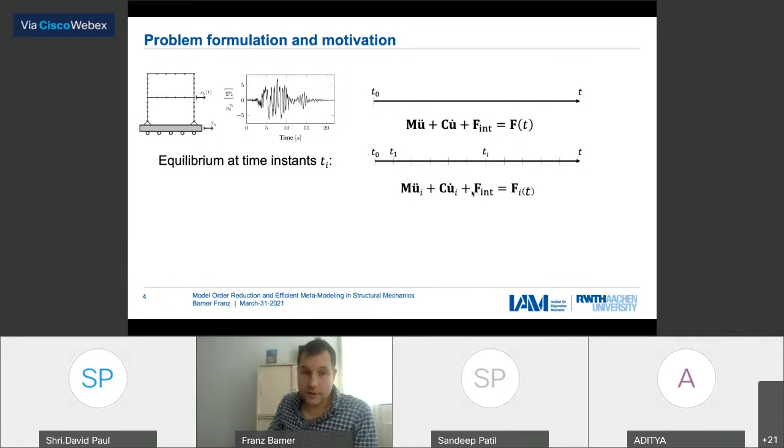That's actually the first basic rule of time integration: that the equation is fulfilled at certain time instances. So we have equilibrium at time instant i, that is, m u_i double dot plus c u_i dot plus f_internal equals f. This is the first big thing. What we do is, and that's the key, we start at a time instant t0, then we have a certain procedure—whatever we do, it's incremental, whether implicit or explicit.

We start at a certain time instant, and then we go over to the next time instant, and the next. Luckily, we have computers who do this for us. So we go step by step, incremental in time, and this is generally the case in nonlinear mechanics, also for high-dimensional systems, whether implicit or explicit. It's a long path until you finally stop your algorithm and start again.

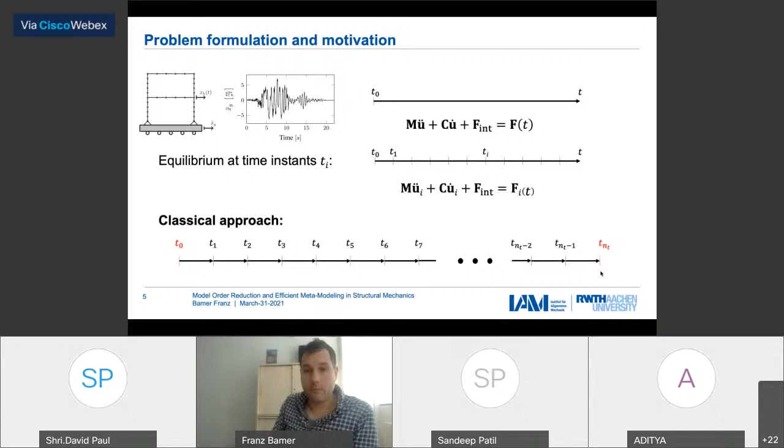Let's look at the static problem, just as a reminder of how to solve such a problem. We have static equilibrium, which demands an iterative solution procedure. Equilibrium means the internal forces in the system are equal to the external forces. You can reformulate the whole thing in an iterative, incremental way.

You say that a tangential stiffness matrix times an incremental displacement equals a residual force, so F external minus F internal, the residual force. Then you proceed again from u to the next time step, so ui is ui minus 1 plus delta u.

Let's look what happens. Now we are starting at ui0. Then we calculate a certain tangential stiffness matrix, which you see in K1J, and then you calculate the residual, and you can solve this problem: K times delta U equals the residual. This equation is solved here, and after solving it, you update the displacement using this.

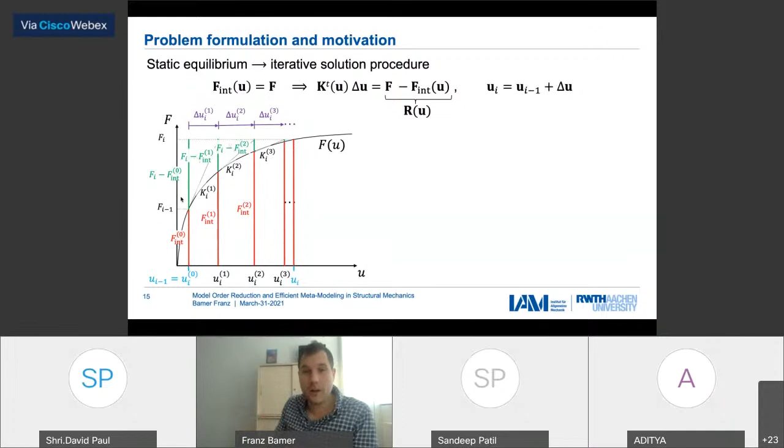So what we're doing is going from one time step, in blue, to the next, from ti minus 1 to ti, or ti to ti plus 1, which is the same. Then you have certain starting conditions, and you solve the nonlinear system iteratively, update, calculate the finite element system, the stresses and strains, the internal force, and then calculate, if you want, a tangential stiffness matrix, which isn't always necessary. You can also do it differently.

So what does this algorithm mean? It's computationally expensive. There are a lot of things that are computationally expensive. The only thing that's not expensive is the simple addition of vectors, done in a fractional amount of time, but everything else becomes computationally expensive when the system gets large, because unfortunately they do.

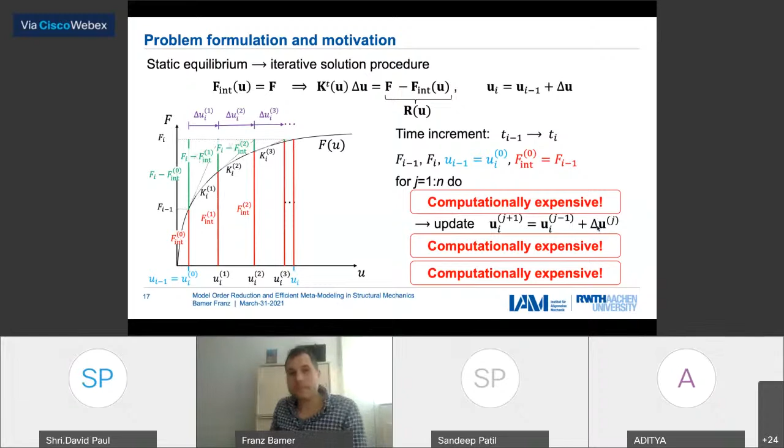So that was the static problem. Now let me give you a little insight into the dynamic problem as well, which I think you already know. This is the equation, let's call it dynamic equilibrium, because Newton says this is not an equilibrium system, while D'Alembert says it is equilibrium. So I'll say it's dynamic equilibrium.

So we have forces of inertia as well here, and damping forces, and this is the explicit formulation of the equation of motion. You can also rewrite this in an implicit formulation, since today we're talking about implicit methods, not explicit methods. So: m times u double dot, plus damping times u dot, k delta u—the tangential stiffness matrix—equals a residual, which is nothing else than an extension of the static equation above by the forces of inertia and the damping forces. So the nonlinearity is generally only in the material in our course or lecture here.

Just to remind you, what we're doing is we have certain vectorial quantities at time instant ti minus 1, and certain vectorial quantities at time instant ti. We go from this to this, and in between, we come to the next point of numerical integration, which says you don't only have fixed time instants where you know you have equilibrium. In between those time instants, you need polynomial interpolations.

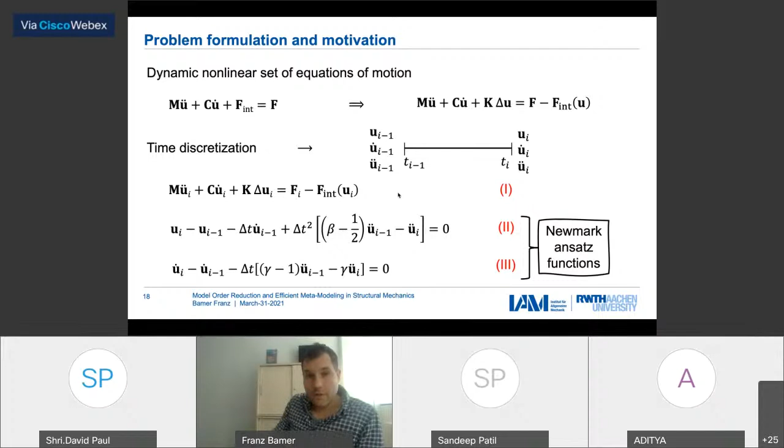We have to go step by step, and things are expensive for the reasons I've told you before. So the next thing in our schedule is how to deal with that. There are a gazillion ways to deal with this, each for certain applications, each with advantages and disadvantages. I'll show you now one method which, in my experience over the last years, has the least number of disadvantages: model order reduction.

This is a space-time solution ansatz. What is the general idea? The general idea is a space-time solution ansatz.

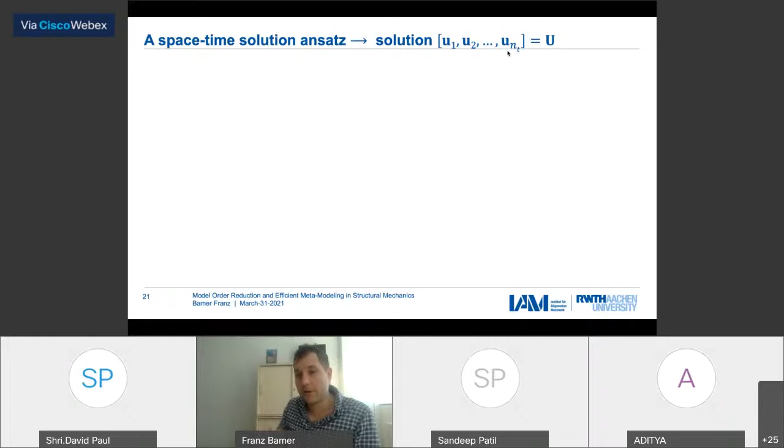Everybody knows you have a solution, a certain displacement function at discrete time instances. We defined this before. At these discrete time instances we have dynamic or static equilibrium, and this can be written as a matrix if you want. It's convenient to write the whole thing as a matrix. Let's even generalize: an object of second order, a vector is an object of first order, and a scalar is an object of order zero. I'm not saying tensor, just an object of the second order.

Now imagine, it doesn't matter where you have it from, you have a certain convenient mode pattern and a certain time function at which this mode pattern moves. This convenient mode pattern is represented in a discrete framework by a vector, and this convenient time pattern is also represented by a vector. So let's put it this way: you have a space vector and a time vector.

So what you're getting is the dyadic product of a space vector with a time vector, which is a matrix. So, a bold statement: the displacement matrix U, the space-time solution, the solution at different time instances, is represented by a dyadic product of a space vector times a time vector. Of course, the challenge is to find this space or time vector.

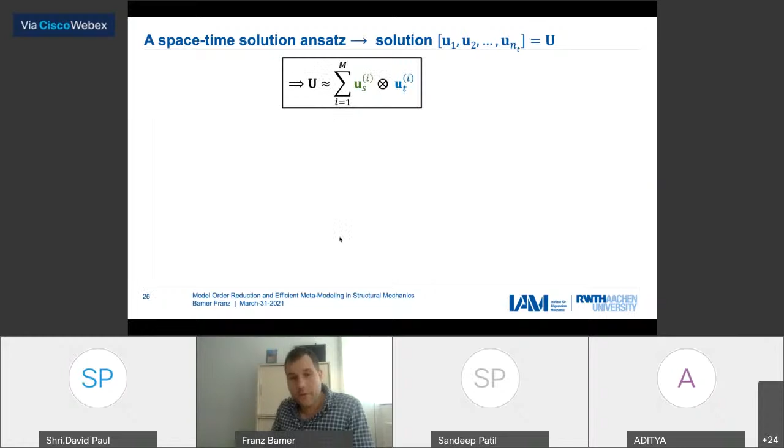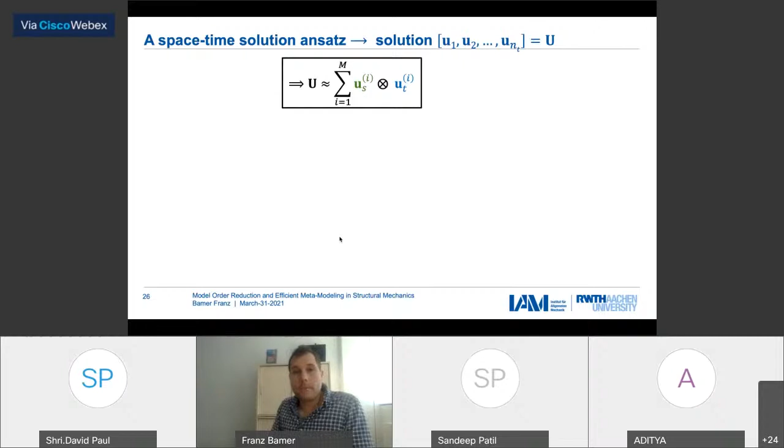So this is our certain magic formula in space-time integration. This is the space-time decomposition. And now look at a certain problem.

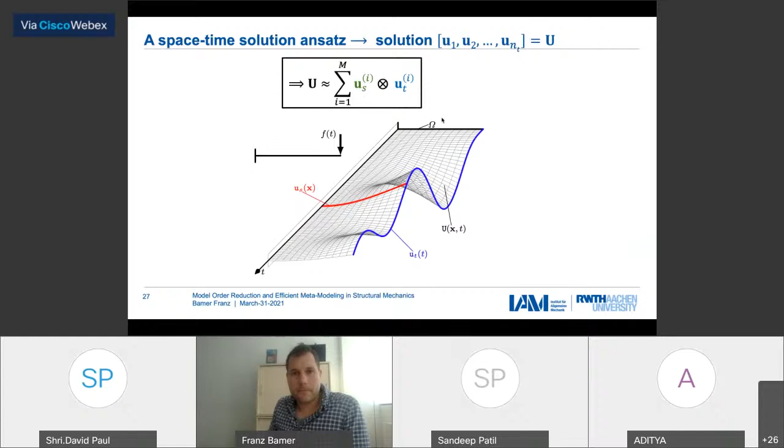So this is the body omega. So the idea is that if you look at that, conventionally we go from time t0 to t1, and we calculate the space vectors incrementally in time. And within these little time instants, we even need expensive iterations.

So let's say we have 2000 time steps, which is nothing special, it's just normal. And you have 2000 time steps times, I don't know, 20, 30, 40 iterations. There is a lot of processes with a lot of big matrices and so on. The idea is, again, to use the whole space-time problem. And in sums, as you see, you sum up and not incrementally, but iteratively build up the whole solution of the problem.

So this is the conventional method, which is incremental. This is a non-incremental method, which is space-time. This is one non-incremental strategy, okay?

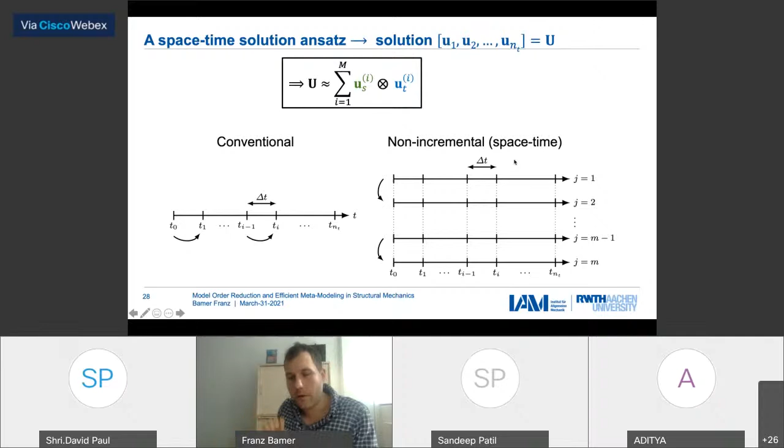Good. So this was the general idea without a mathematical framework. You can imagine mathematically, it's not... you have to explain a lot of things, and it's not written in such a nice way and illustratively, okay?

Let's now talk about one application of the whole thing, one nonlinear application, which typical nonlinearity is elastoplasticity. In engineering, you need it - steel behaves elastoplastic, a lot of materials do. So elastoplasticity is kind of a benchmark example for these numerical methods. Okay.

In order to deal with this problem, we have to produce space-time equivalence of the equation you saw before, which is static equilibrium. Static equilibrium, just to remind you, was F internal equal to F external.

Or in an iterative, incremental way, K tangential times delta U is the residual. That's the incremental equation. And this equation of equilibrium has to be transformed into space-time.

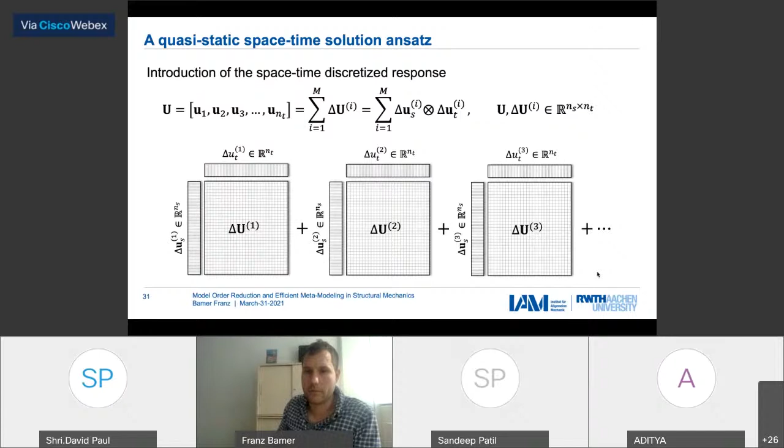Let's go to the next thing. Space-time stiffness is not so straightforward, especially how to put it in a continuous framework - it's not so straightforward.

In a continuous framework, it's called a kernel, and here it's an object of third order. I can also say a kernel. That K, the object K with third order, is a dyadic product of a space stiffness matrix times its time stiffness vector. And this time stiffness vector is not trivial, and it's also controversial because other people from France, for example, claim that the time stiffness can also be represented by a T times T matrix and not a vector. However, in our paper, we have proven that in our formulation, this can be represented by a vector.

So the sum of space stiffness, the dyadic product with time vectors, is an object of third order, which is an object of ns times ns times nt. It's a cube - no, it's not a cube, it has a certain length. It's okay numerically, but again this is just to imagine what's going on, because numerically I will show you that we perhaps don't need all this. I mean, we need to formulate it, but we can use certain tricks to make it more efficient, because these cubes are generally very expensive in space.

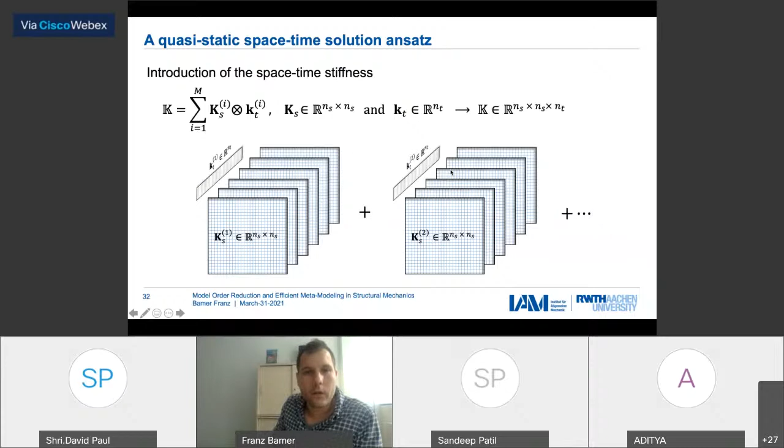My thing always goes forward on itself. I don't know why. Okay, let's go forward.

So we have the stiffness matrix, we have the K times delta U, we have the incremental displacement, and now let's look at the residual. The residual R in a space-time formulation is, of course, also certain residual vectors at different time instants. Using a residual matrix, or residual object of second order, represented by a matrix, you have the space residual times a certain singular value matrix times the time residual.

So what do we do? We use the singular value decomposition to decompose into ns times ns objects, where ns is the number of degrees of freedom in space, and nt times nt object, which means object in time. Reduce it. So you can rewrite this as an S times S matrix and T times T matrix and a diagonal rectangular matrix.

If you're interested, this singular value decomposition is a more general form of the eigenvalue decomposition. So you have Rs dyadic Rt in vectors as a sum of all singular values, which is equivalent to this matrix formulation. But as you see, it brings us our space-time decomposition of the residual.

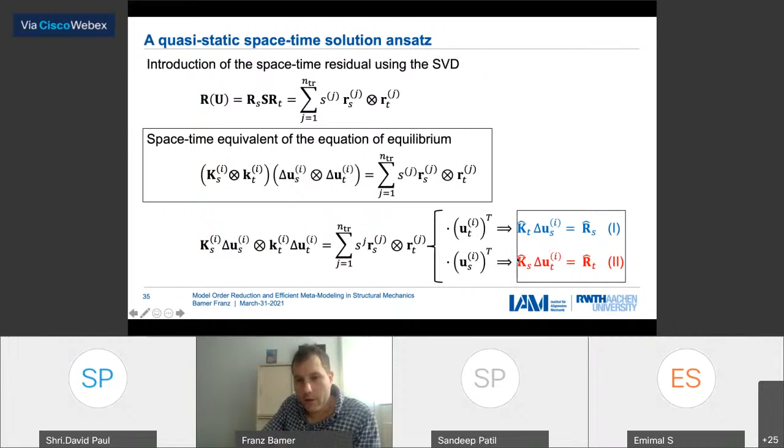Now what we do is we transform, because we don't want an equation of order 2 - you need Krylov-based solvers to solve this problem and so on, which you're also working on right now. But this equation is transformed into space and transformed into time, so projected into space and projected into time, which gives the blue equation, a kind of space equation, and the red equation, which is a time equation. So we have projected equations, two coupled space-time equations: the blue one is the space, the red one is the time.

Yeah, and that's the important point. They are coupled, of course they are. A system at a certain time instance, it matters what happened the time instant before. So the systems at certain time instances are coupled, of course.

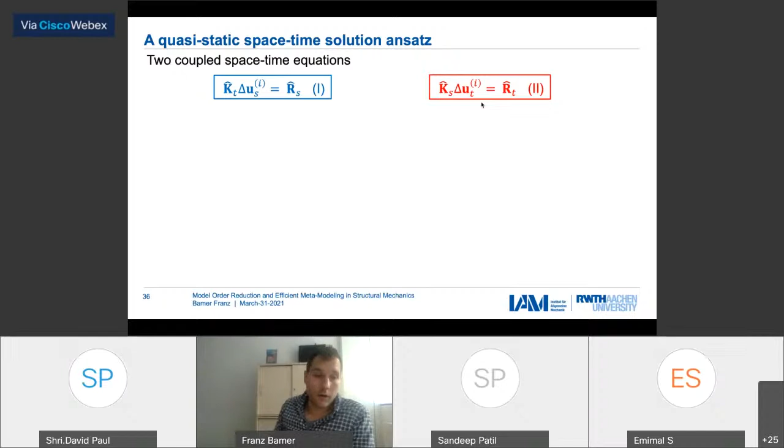This is a system of two equations you have to solve. So let's solve that. We're not using the Newton-Raphson algorithm because we're using a different algorithm. We use the fixed point algorithm. So let's look at the solution here.

This is a one-dimensional representation as illustration. The blue curve is the space curve, and the red curve is the time curve. Where the two match, where the two intersect, we have our space-time solution of the problem, which is the solution of the problem. I call it space-time because it's a space-time method.

What we do now is use the fixed point algorithm, which turns out to be extremely effective. We start from a certain point, ut, which is here. Then I fix a certain point ut, go into equation 1 and calculate us, solving this linear equation. Furthermore, now I fix us and calculate ut, so then I solve the red equation. Then again, I fix ut and solve us, solving the blue equation, and so on.

So you see here, for example, it converges within 1, 2, 3, 4 steps, which is actually realistic. For elastic problems, the space and time modes, us and ut, are validated generally within the first three iterations.

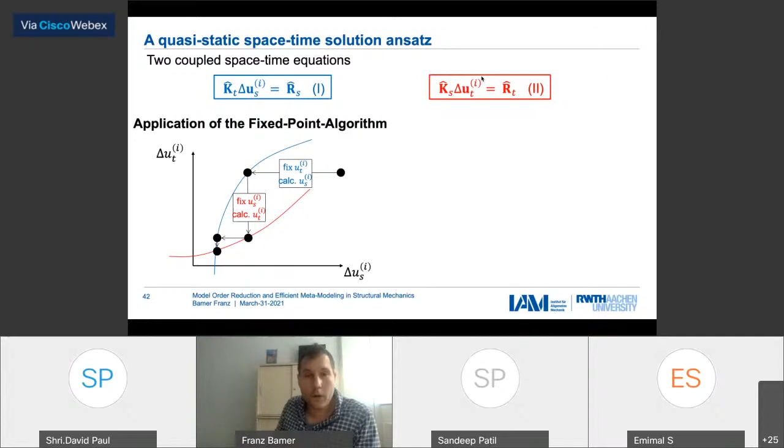What's the convergence criterion? The convergence criterion is also equivalent to the incremental formulation. You just calculate the mistake you make, the error you make. This is the equation, and the error you make must be smaller than a certain positive value, so that you fulfill your convergence criterion.

After you've fulfilled the convergence criterion, you've converged for the first two modes, and then you update your system with the already obtained solution, delta us, delta ut, summed up, plus the enrichment of the solution on the right side. So we enrich the solution. This is from Mechanics Research Communications, this algorithm.

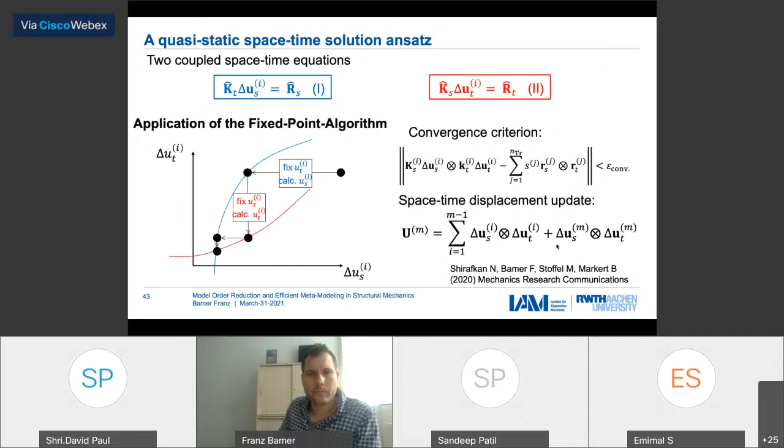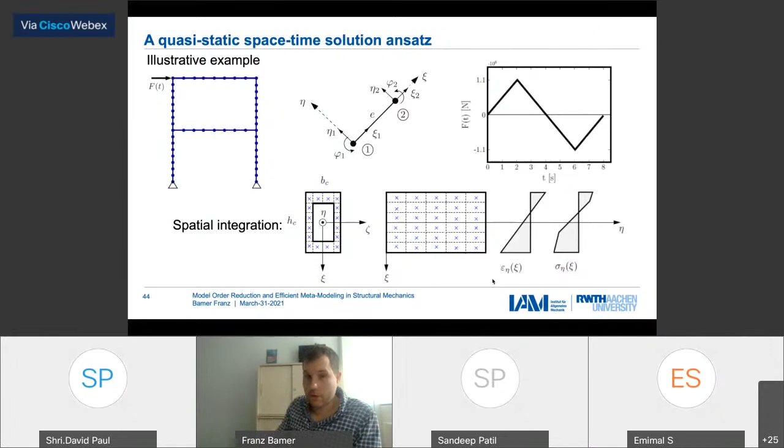This is elastoplastic, so we follow a certain history in anticipation that we know already that something will happen, that a certain plasticity will occur. So it increases, decreases, and increases again, and hopefully we will have plastification. Of course we have to take care of that, but then we have certain Gauss integration points, and in these Gauss integration points you solve the material law.

The problem of elastoplasticity seems to be mostly in the temporal scale. There's the problem of time history and everything, and the whole action is happening there. There's not that much happening in the space direction. Of course, you will see here already some kind of elastoplastic deformation in the kinematics of the system, but the most action is happening in the time scale regarding elastoplasticity.

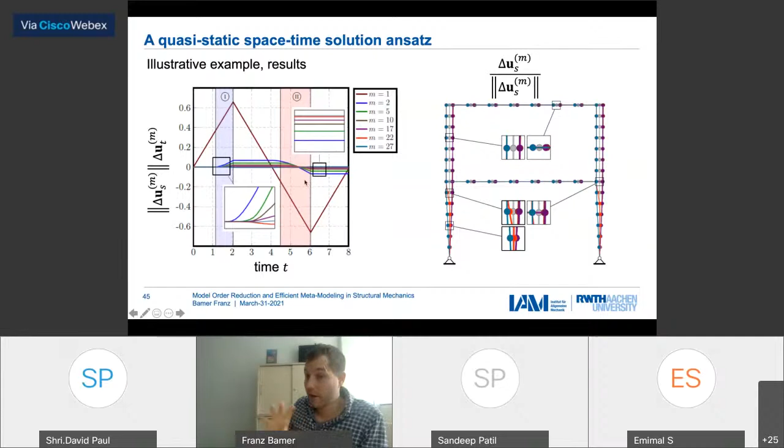We will talk about dynamics later. This is the solution function. You have a linear solution curve. Let's say you have a linear system, then you also have a linear response, which is the first enrichment, as shown here by this red curve.

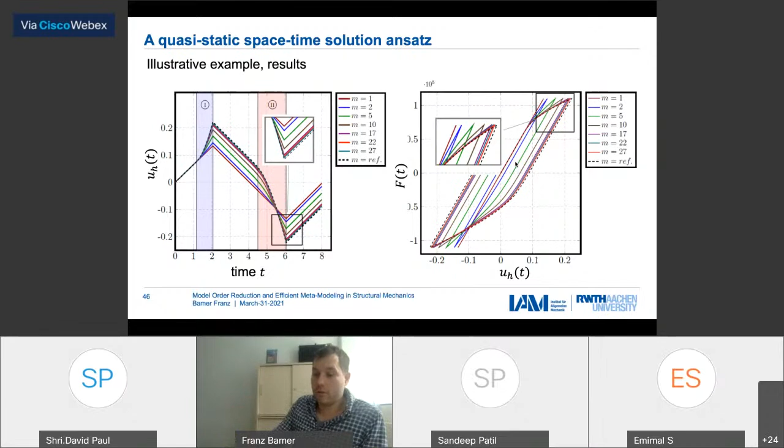In the first enrichment, you see here that you are walking in the linear scale. Then with the next and next enrichment, the system evolves. Generally after 10 enrichments, or here, 17 enrichments, the solution is converged quite properly. Keep in mind we have 2000 time steps, and otherwise in every time step with a Newton-Raphson algorithm we need already 20, 30 iterations sometimes, depending on how much plasticity occurs. Okay, so the point before the last point now.

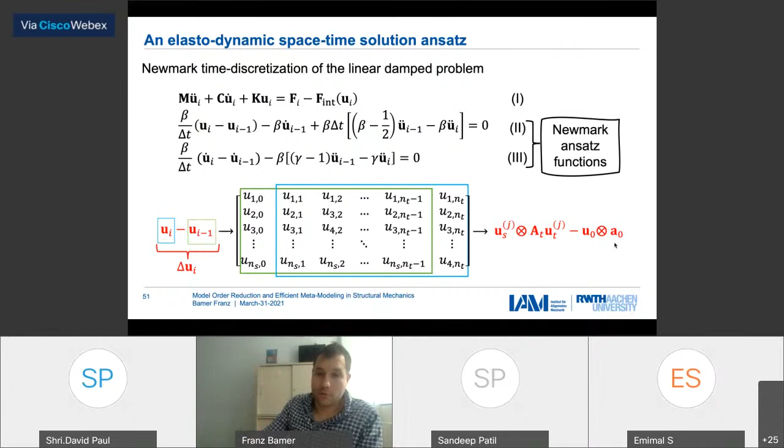Now we use this strategy to transform the whole incremental system into space-time equivalence. Look at them - you transform this part here into space-time equivalent. You transform this here, yellow, green, and black.

And then you derive from this the Newmark space-time formulations in second order equations. People say tensor order equation - I don't like it that much because it's not really tensors, but yeah, it's numerical tensors.

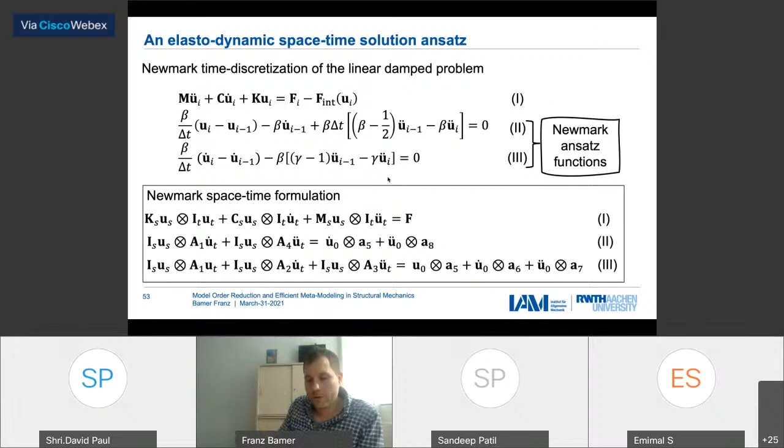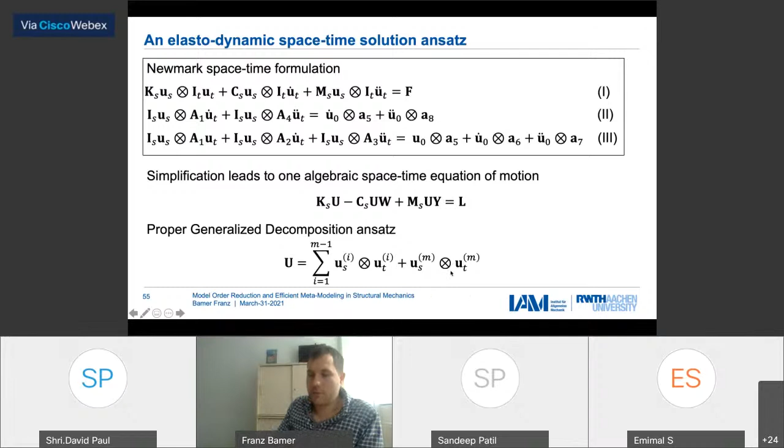Now we have our space-time decomposition ansatz. So we have the sum here, which is the already calculated solution from before in the algorithm, and this is the new one, the displacement m. Now it's going to get a little bit uglier because the equations are a little bit longer.

You insert this into the space-time equation of motion, and you have here already the force term. The force term also has to be decomposed into space and time, you see it here. It's a little bit uglier, but it's the same procedure as before for the quasi-static problem. This is why it's so beautiful.

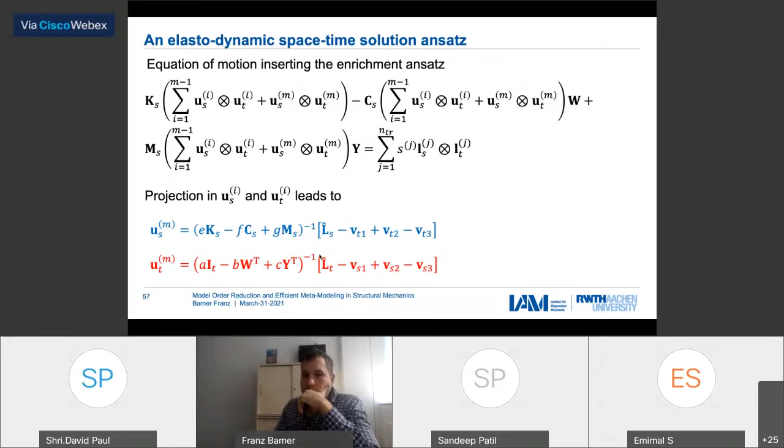You project this equation into space and time, and then you have a space equation and a time equation, which leads to the solution of linear equations. Again, we're not using any Newton-Raphson algorithm - no, we use the fixed point algorithm, which converges, as shown before, very, very fast.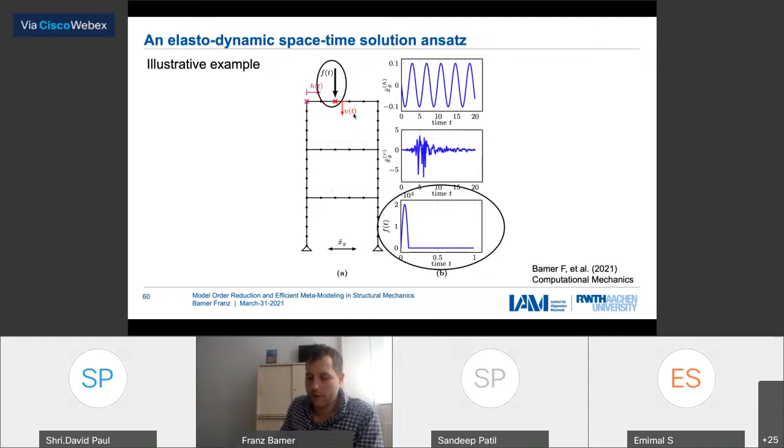Because of time constraints, I'm not showing you all the results - you can look it up in the paper. I'll show you the results that work worst for this method, the most inconvenient problem, which is the impact. I'll show you this example now, and I'll show you that already there is very good convergence for this example. For the other ones, the convergence is even better. You can look it up in the paper if you want to.

So the illustrative examples you see here, with increasing number of enrichments, we have certain space and time functions of this problem with which the solution is enriched - the first four solutions here.

Then you see here the displacement of this node, which is the red cross, and the vertical displacement is plotted here. The black line is the incremental solution, and the blue line is the space-time solution. You see already that it converges quite well after 15 enrichments - there's not really anything happening anymore in the space-time solution. So even in this worst case scenario, which I think is the worst case scenario until now, the space-time solution works very well in a structural dynamic framework.

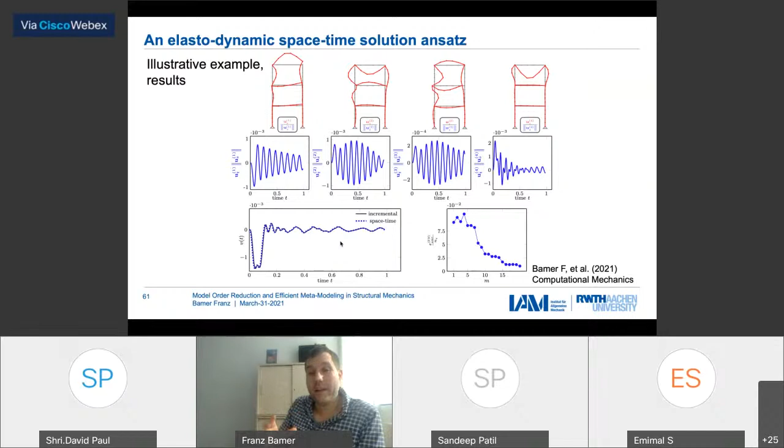A small recap of space-time integration schemes. Space-time formulations are for nonlinear quasi-static problems we have presented. The mechanical problem is described by two coupled space-time equations, which are solved by the fixed point algorithm, as I already said.

If you know a lot about model order reduction, then you know you generally need a priori system identification, singular value decompositions, and you have to know quite a bit. That's the ironic thing: you have to know already how the system will behave in order to reduce it, which is crazy, but it's the way it is right now.

So for this method, that's not the case. This is why I wanted to present you this method, because it seems to work stable for a lot of problems. So no a priori identification, as you'd need using a model order reduction approach.

I didn't say this before, but the Newmark algorithm is very, very effective. The space-time algorithm's speed up is of course dependent on how many enrichments you use, but for the problem above, you have a speed up of a factor of about 2 or 3 for the linear problem compared with Newmark. For the nonlinear problem, I think the speed up is even much better.

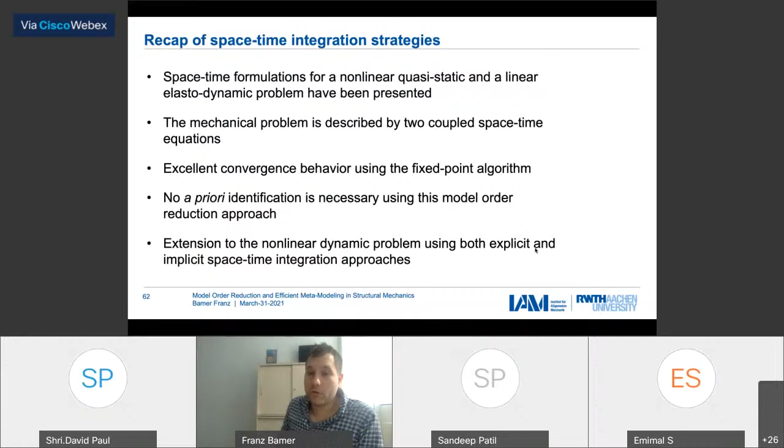So finally, we are now extending the system to nonlinear, so the space-time system to nonlinear dynamic problems, which is our current research on this.

I also want to, as I promised, mention this was a very nice method, not classical model order reduction, but model order reduction with a certain physical motivation. It seems to me that the world is going a little bit away from physical approaches and is more interested in data information, because there are quite fancy methods you can do with data. So I want to present one approach that deals with data.

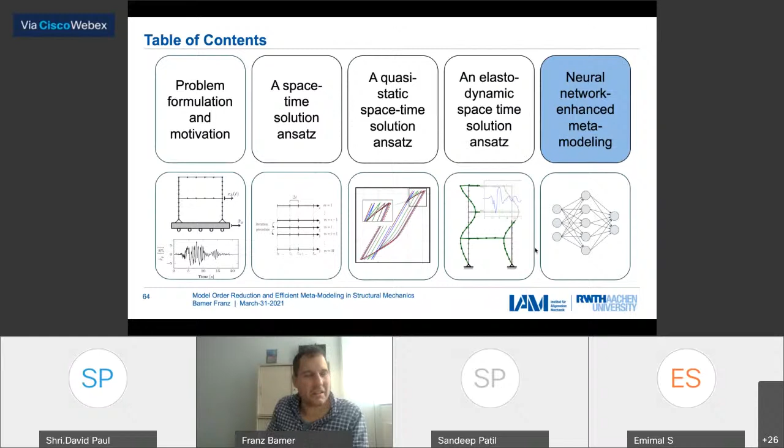I want to present this approach because I think here the data-driven strategy really makes sense. Sometimes it doesn't really make sense, because you already need data to train, for example, a neural network—you have to already have the solution of the system. So here, I think in a certain way, it makes sense. What I think, okay.

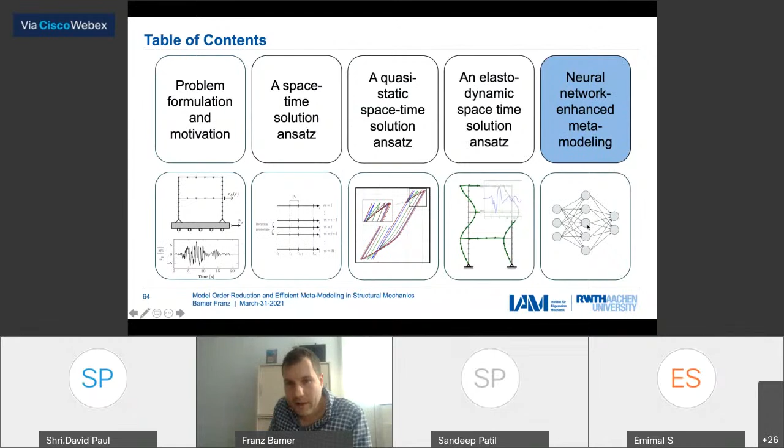I want to introduce to you the meta modeling of systems using Monte Carlo simulations. This is the first motivation for where to apply it. We can also apply it to speed up numerical problems and so on. However, this is too much for the lecture here, but let me explain this, and you can find the rest in the papers on Google Scholar or elsewhere from our team.

So where to apply Monte Carlo simulation and why? Because it can actually speed up the Monte Carlo simulation from a practical engineering point of view. A lot of people say you can speed up with neural networks so fast—yeah, they are fast once trained, but training them is an expensive procedure. So you can already say they're not necessarily much faster than the normal procedure, and they're more inaccurate. This is always a discussion, and there are a lot of papers written right now. However, you always have this burden for practical applications, and this is where I want to use it now.

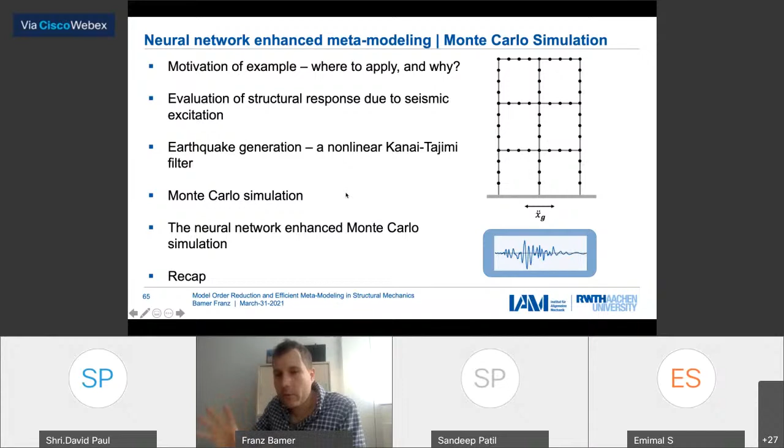So we want to present a neural network enhanced Monte Carlo simulation, and then I'll give you a recap. For this, we generate earthquakes artificially, as you see here, and excite the structure.

Let's look at the problem of earthquake engineering and structural failure. The problem of nonlinearity is really bad in earthquake engineering because you don't know what happens next. Nonlinear systems cannot tell you what will happen in the future—you have to integrate it numerically, you have to do the hardcore integrating procedure.

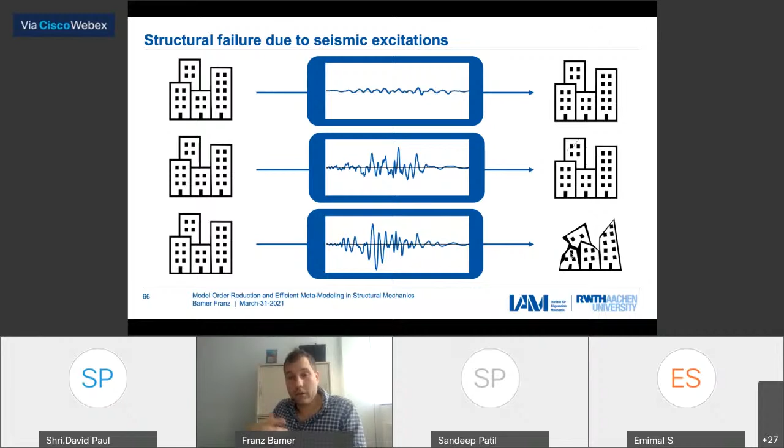So, for example, let's look at one earthquake here, and it results in no damage to the structure—we are happy, everything okay. Let's look at another earthquake here with a certain intensity, let's say a magnitude of 7, and you have certain cracks in the structure. Let's take another earthquake at the same intensity of 7, and it breaks down. The problem is the damage of cantilever structures is nonlinear, and you have to integrate numerically to give an answer. This is the big problem, and the probability of failure of a certain structure for nonlinear systems is also a big issue, which is actually not solved by now.

Only solved by one method, which is the Monte Carlo method. Monte Carlo method means you try it so often that the structure fails a few times and doesn't fail other times, and then you count the times it failed, and this gives the probability of failure.

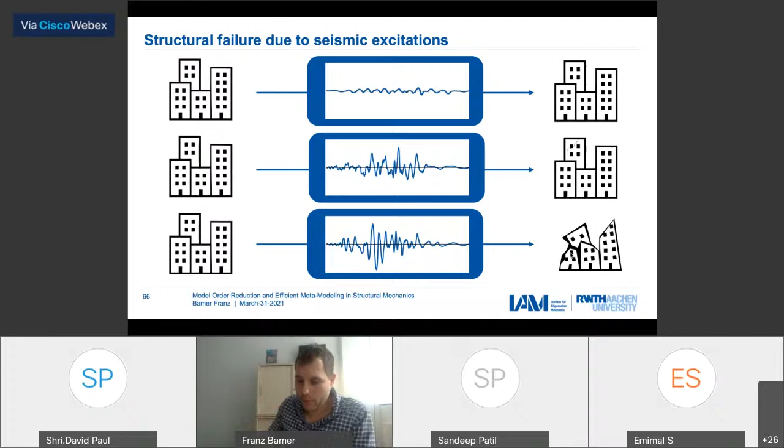Okay, so I will repeat this again, a little bit more probabilistic. This is the probability of failure - is it the integral? No, this is the probability of failure already calculated by Monte Carlo simulation. It's the integral of certain indicator functions over the whole domain of the system. So the Monte Carlo method, what this integral says is...

If I want to know how the probability of structural failure is, I calculate 1,000 random simulations. The structure failed 200 times. Then the probability of failure is 200 over 1,000, which is 1 over 5, which is 20%.

And now we come already to the problem. So what did I do now? I did nothing else than calculate an estimation of the probability of failure - an estimated value. This is the Monte Carlo simulation, in terms of an estimated value. I said the probability is 1 over 5 because I did 1,000 experiments. Now we are coming to the big issue of the Monte Carlo simulation.

In engineering, we want structures to fail very rarely. So let's say from 1,000 samples, we want them to fail 0 times. We need to calculate 100,000 samples, and at 100,000 samples we want it to fail maybe 10 times. So you need to calculate 100,000 samples to get a probability of failure of, let's say, 10 to the power of minus 4.

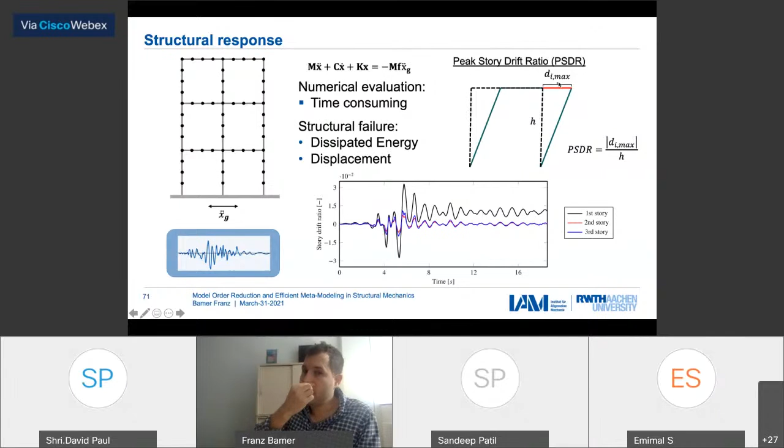Here you see, for example, one numerical example. You have a structure, you have a ground excitation, and then it vibrates somehow. And then one important thing you calculate is the peak story drift ratio - the ratio of how much the peak, mostly the first one, goes to the side. And then you see the story drift here with time.

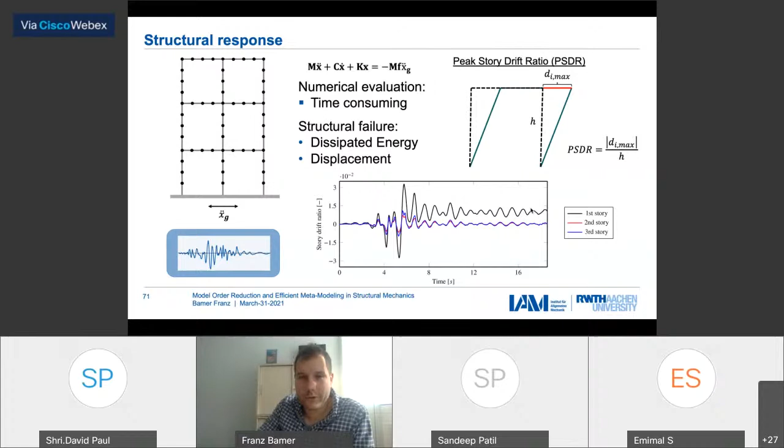And then you see that the first story weirdly stays to the side. There are certain pictures - if you Google earthquake damage to structures - they tend to stay like this afterwards, so there was severe damage. In this case, there's severe damage; you can throw the building out afterwards, get rid of it. There is no way you are repairing such a building.

So the strategy is: we have a structure, we have a certain amount of excitation functions - that's the Monte Carlo method. We evaluate all the response sets to these excitation functions, calculate the peak story drift ratio as the example of the vibration, and then the probability of failure.

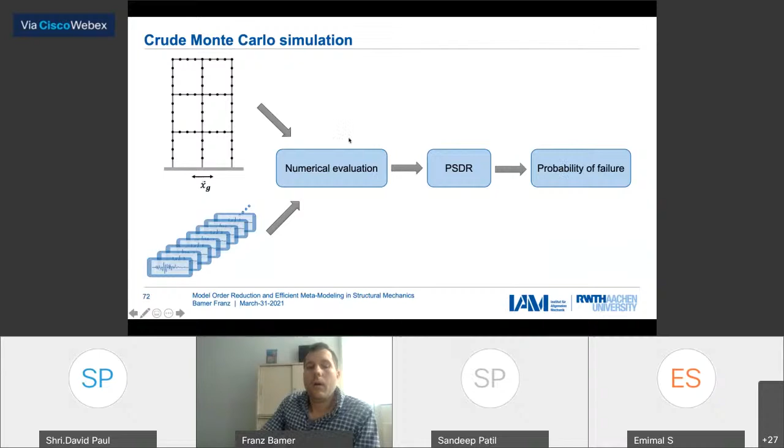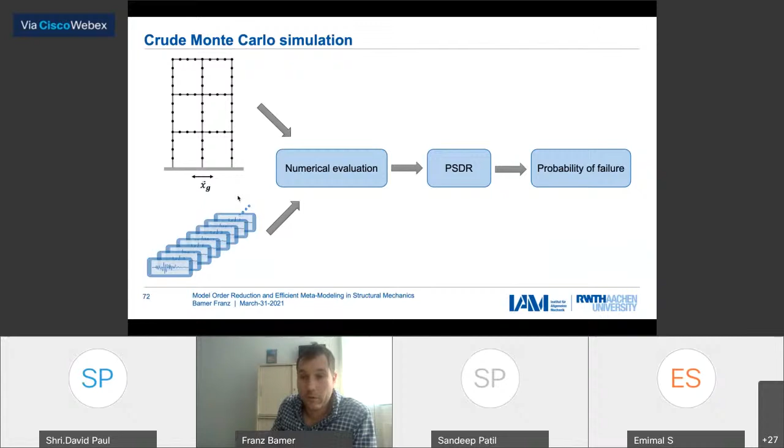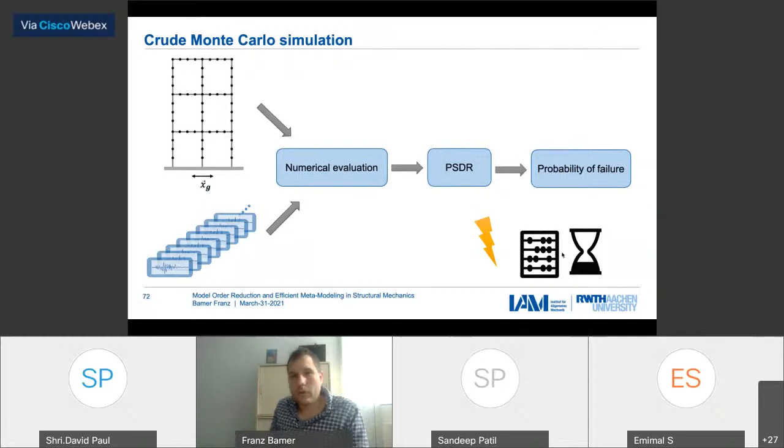It is, of course, not feasible, especially for this structure—perhaps yes, but for real engineering structures where you have a lot of degrees of freedom and nonlinear properties, it's not feasible, especially if you have 100,000 earthquakes to go through. We talked about this before. This is numerically not possible or very hard. So this is very bad—it takes a lot of time, and we need a lot of calculators, a lot of people to calculate here.

So what we are doing now is the green box is a training procedure, and the red box is the prediction procedure. The training procedure is when a small initial sample set helps us calculate the response functions and the output functions and train a neural network with these functions. After this initial sample set is finished, if it's trained enough—in neural networks you have certain procedures, a training strategy, then validation and test sets—when the test set is fine, you say okay, my neural network seems to work well. Now I go with all the number crunching, all the data goes through the neural network, and we predict the PSDR and get the probability of failure.

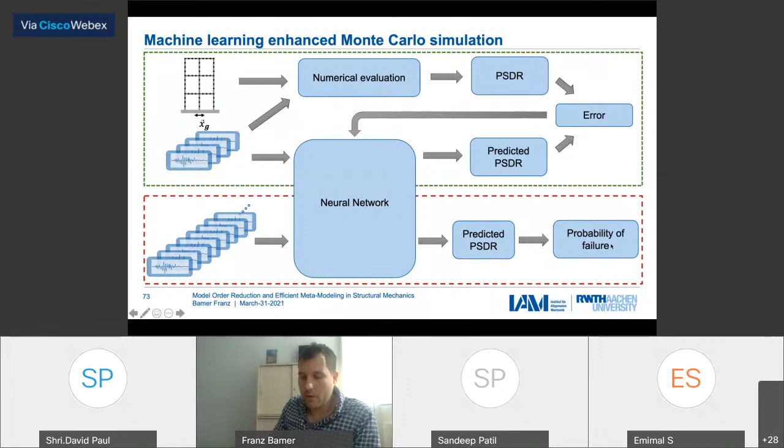But the neural network fails, of course. It didn't see the data, it doesn't know what to do up there. So the neural network says everything is fine. And that's the problem—neural networks don't have the amount of creativity that's necessary to extrapolate data very well.

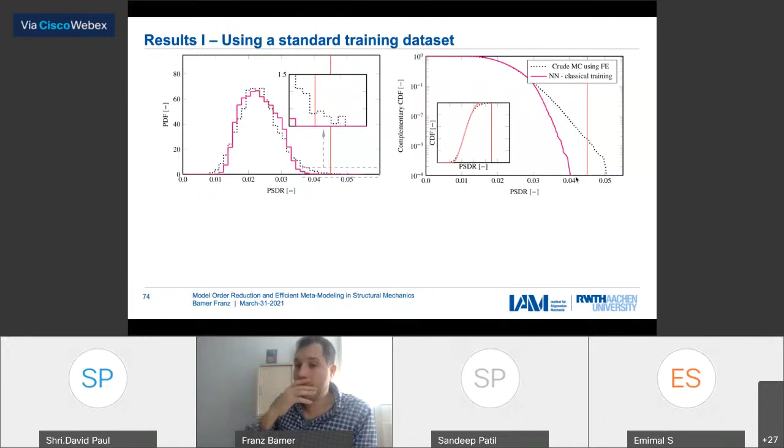So what to do? We have good results about the mean region, which is fine, perhaps for structural maintenance and everything—that's okay. But for the nonlinear range, the range that's really of interest, we have a problem. What are we doing? We use an extended strategy, training the neural network with an extended training set—extended so the neural network sees more, it learns new things.

Then you see the results here. At first it's bad, because the extended set doesn't know the mean so well anymore—the mean region of the distribution is approximately the same, but that's not so important. The neural network performs very well in the tail end of the distribution, and the tail end is the important thing in structural engineering.

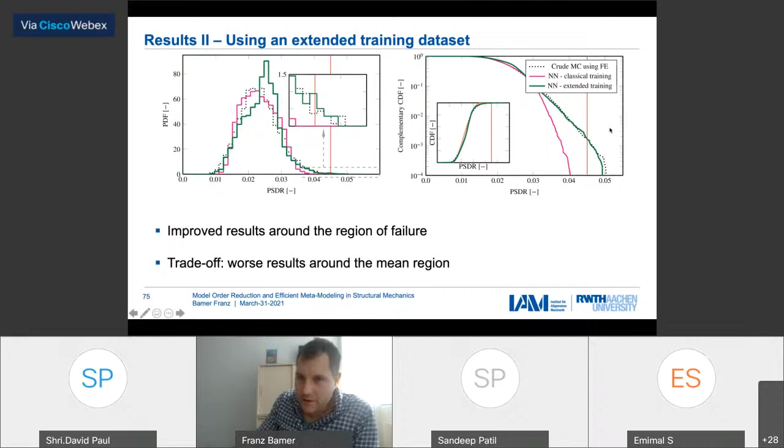So it means that compared to the classical training, the neural network with extended training can really predict accurately the probability of failure for very small probabilities, for very rare events. We have improved results around the region of failure, but the mean region is not as good—though that doesn't matter so much. What matters is the tail end of the distribution for failure computation.

So now a little bit about the neural networks. We have to classify or describe certain excitation functions—you have acceleration, velocity, and amplitude in terms of intensities. Then you have intensity measures, which are the input into our fully connected neural network problem. You can look this up—it's a feed-forward neural network, and the output is the peak story drift ratio. So it's a simple neural network.

I'm not using any complicated neural network architecture because that's not, in my opinion, the point here. I want you to concentrate on the method as well. Using a more complex neural network architecture is not a secret—you can use TensorFlow, or whatever you want, different neural networks. The strategy here is that a simple neural network is sufficient to do this, and it is extremely fast if you have two layers.

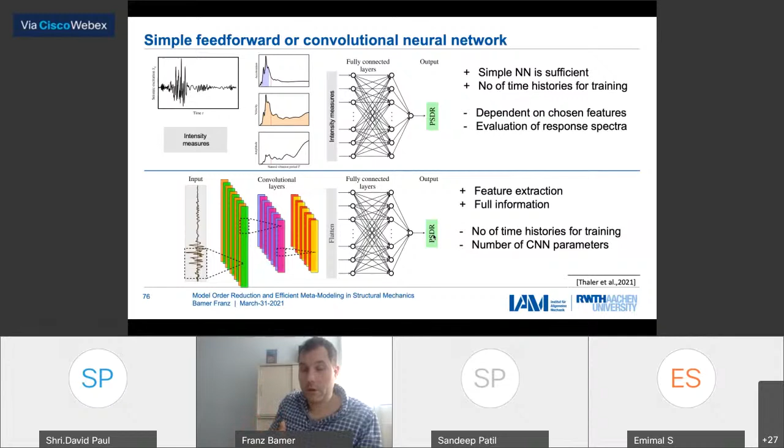And then in the end, we have a second neural network that's a little bit more complex—a convolutional layer—where the hand-chosen intensity measures are not necessary anymore. The neural network chooses this value itself and calculates the PSDR with that. So a more complicated neural network, a convolutional neural network, does the job well too. So we have improved neural network architectures.

We have high quality data with several benchmark records, and we have sampling methods for the proposed strategy. Thank you very much. I'm very open to questions now, and very excited about discussions. Thank you.

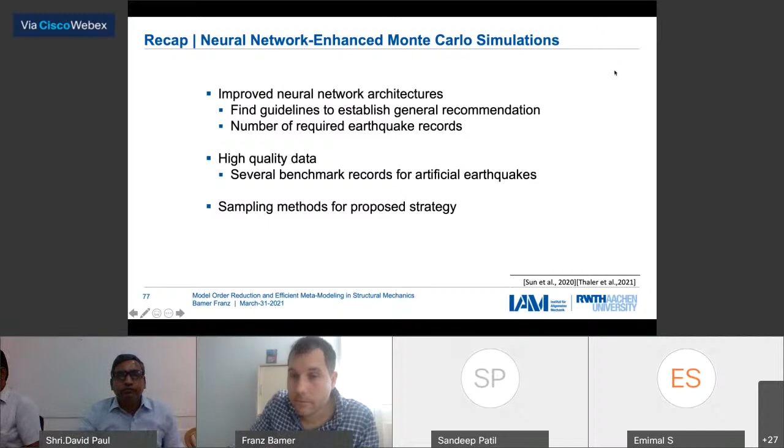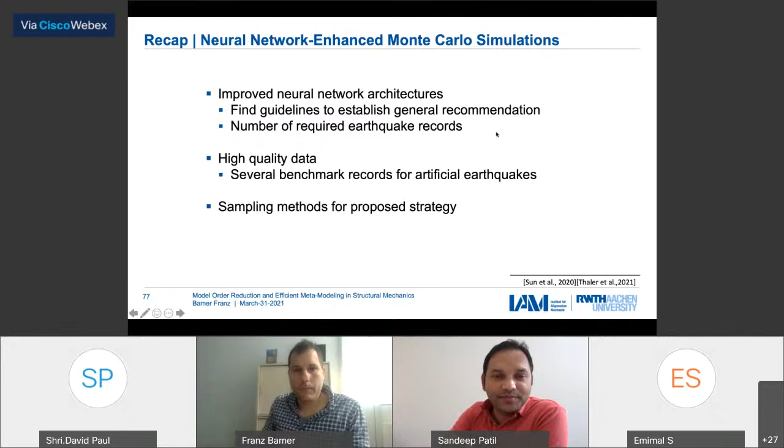Question: how do we improve the results in the region of failure? How do I prove... what do you mean by improve? Okay, let me go back.

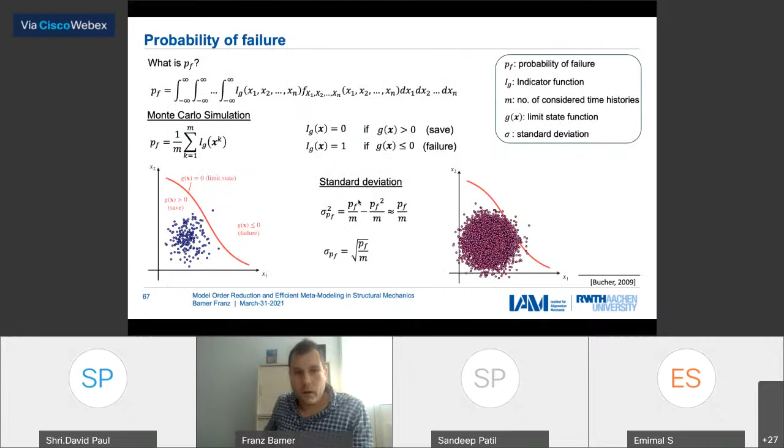Let me put it this way. The problem is that a normal neural network does not work well to predict structural failure, because it almost saw nothing around there. There was nothing to see because we want failure to happen very rarely.

What you do is extend the range of data far into the region of failure, so that the neural network learns how to deal with it when it comes to that. And how do we do it?

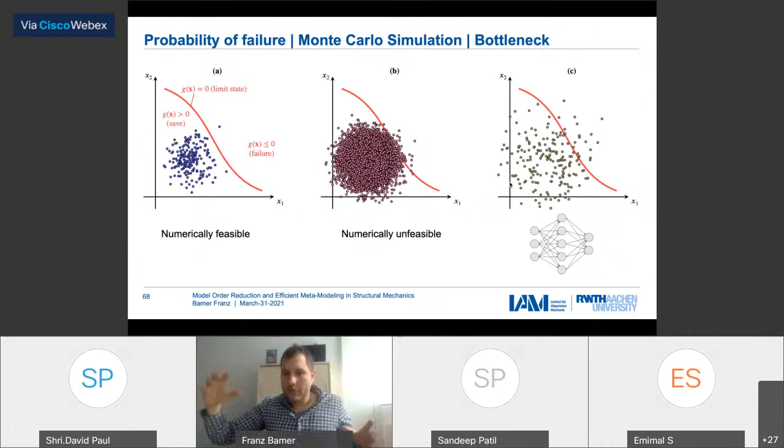We go over the earthquake and measure certain intensity measures. These intensity measures are multiplied by a certain Gaussian random factor, including another higher variance for this Gaussian random factor for the intensity of earthquakes. You see that the earthquake sample set spreads significantly.

So technically the answer to your question is: we increase the variance of the intensity factor of the extracted earthquake measurements. The earthquake still has similar properties, but the intensity is changed a little bit. I hope I answered your question with that.